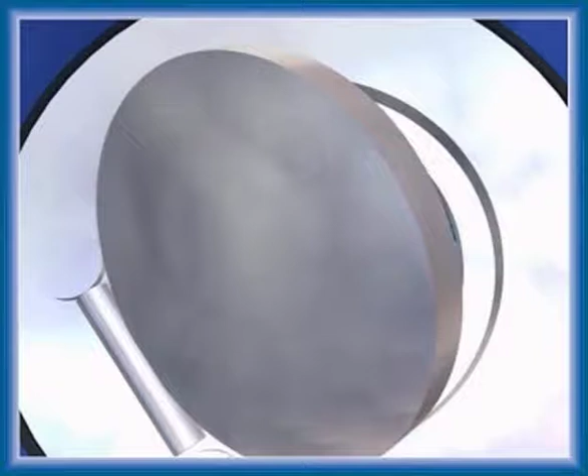Feroplast is a private company established in 1983. Its basic activity is process equipment production and trade.

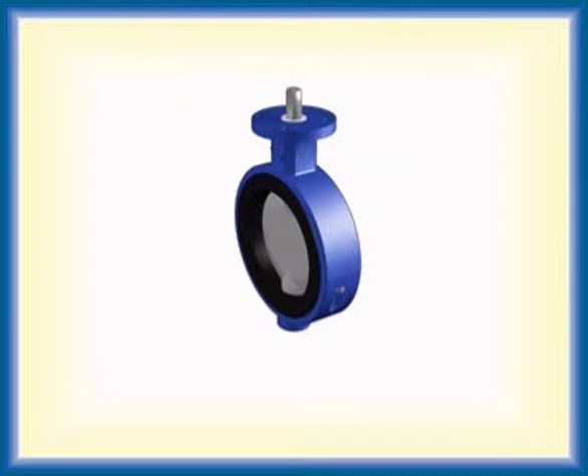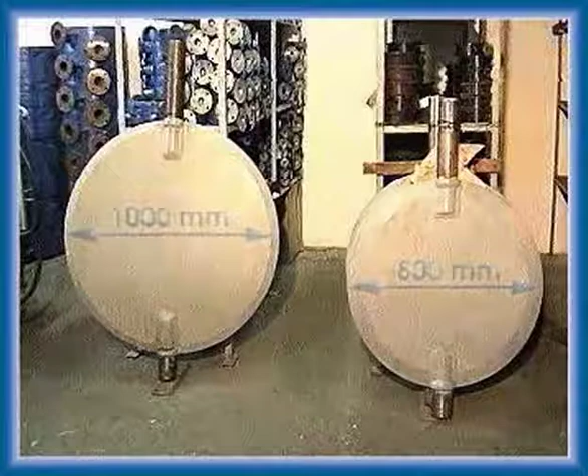The core of our production program consists of butterfly valves of all nominal diameters, intended for all kinds of operating conditions and for different mediums that flow through, with several drive types for their opening and closing.

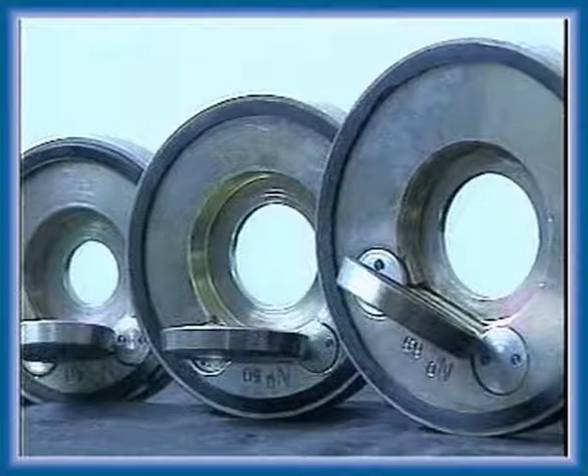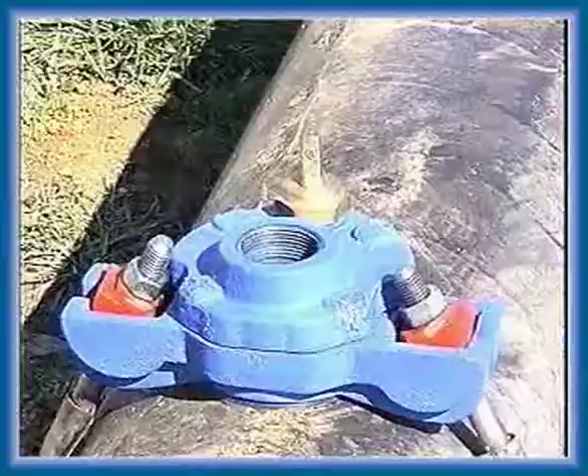Feroplast is a modern company with wide product assortment, big production series and up-to-date computer and engineering technologies in construction and output process. Applying new technologies and production programs is accompanied by acquiring quality certificates, so that Feroplast now has TÜV certificates for production process quality and for welding quality.

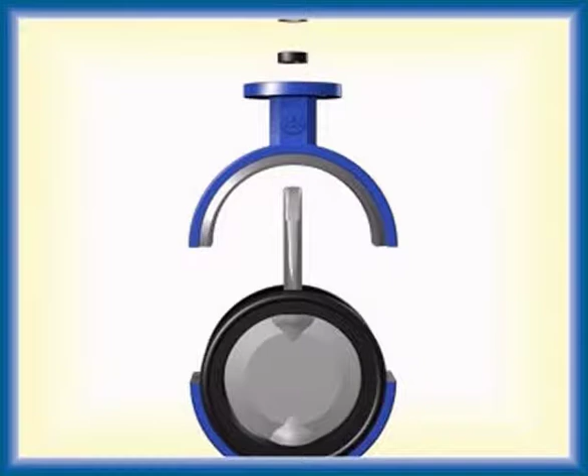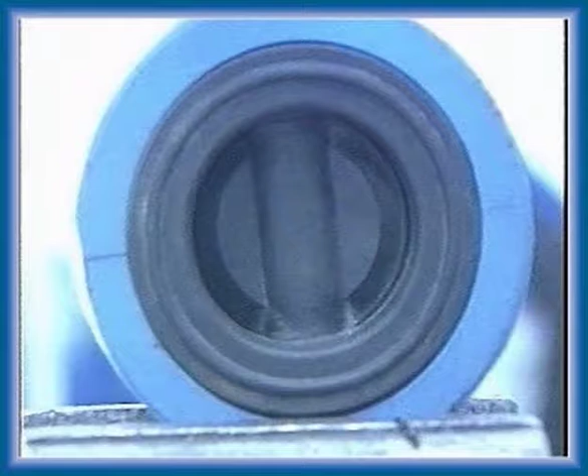Feroplast valves for chemicals, industrial waters, drinking water and food industry are applied in all circumstances where absolute sealing is required. Special manufacturing, depending on the type of mediums that flow through the pipes, enables them to be applied widely.

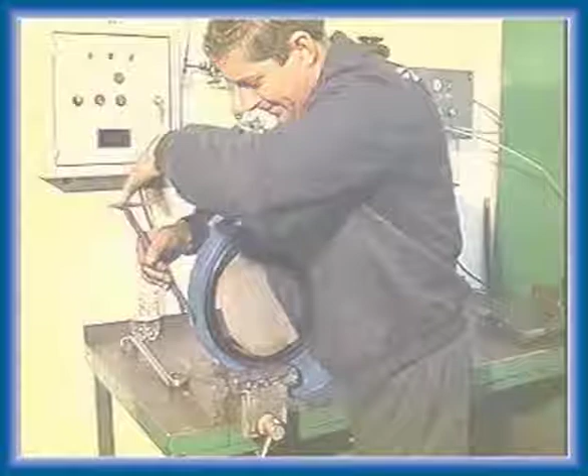For heating pipes, boiler rooms, flotation, water pipes, drinking and seawater, geothermal technology, waste and other waters, acids, bases and other aggressive substances, air and gases, oil and oil products, alcohol and soft drink industries, chemical and food processing industries.

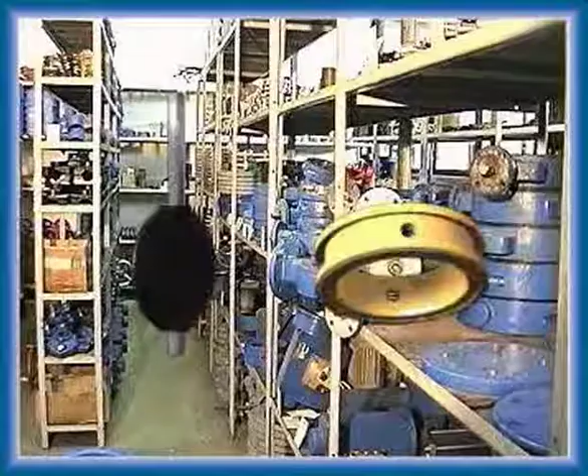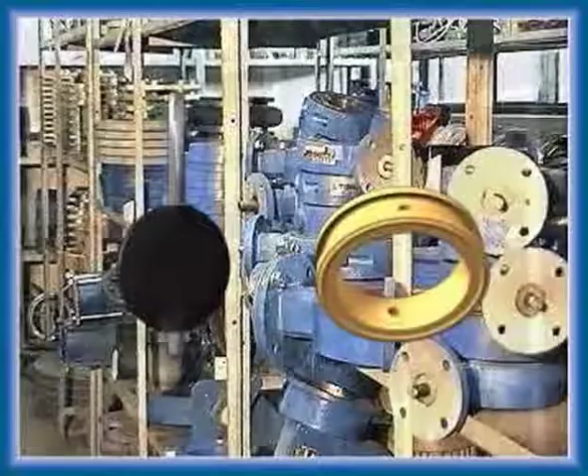The basic properties of Feroplast valves are valve diameters 25 to 1200 mm, working pressure 6 to 25 bar, compact design and weight lessened by up to 5 times, same differential pressure, irrelevant flow resistance, possibility of rapid closing and flow control.

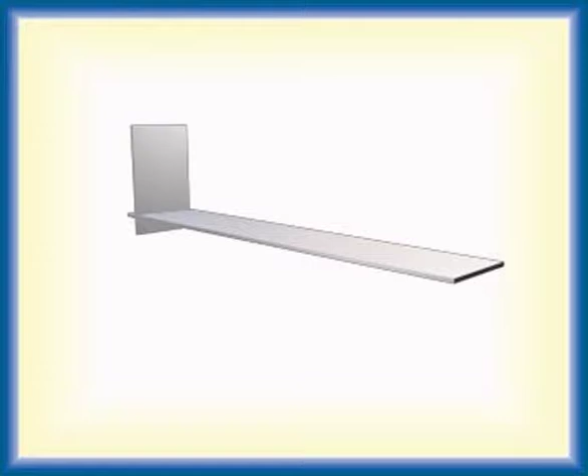Possibility of installing in any position independently of direction of flow, exceptional endurance to aggressive substances and changes of temperature, guarantee on 10,000 moves for all mediums.

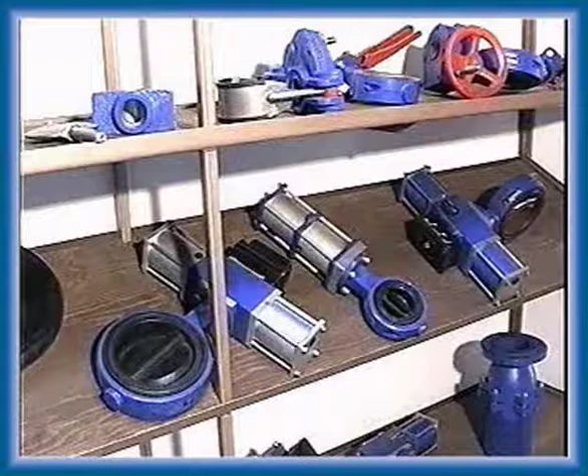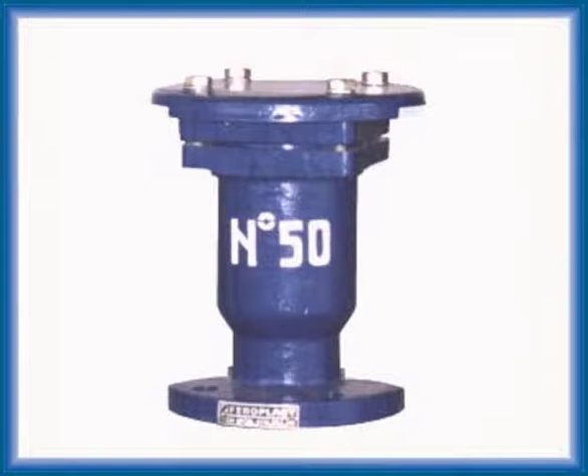Feroplast produces automatic air inlet relief valves. With one ball, it allows exit of air during filling and entrance of air during emptying, as soon as the pressure in the pipeline becomes lower than atmospheric pressure. A trouble-free operation of the pipeline is thereby secured.

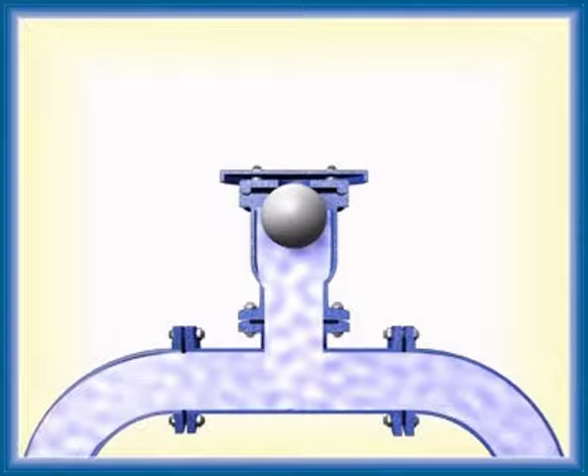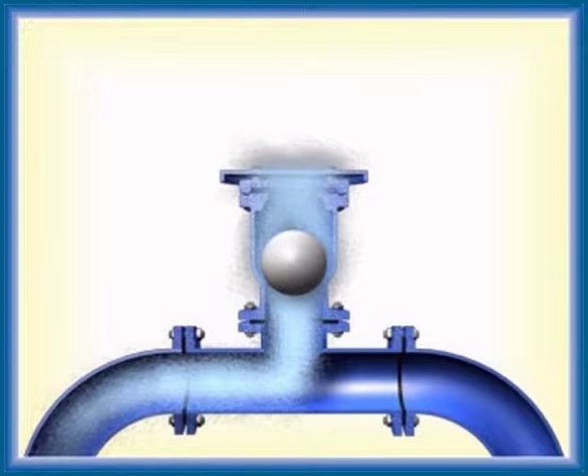Elimination of separated air, which was dissolved in water, is not possible with this design. The functioning is self-acting, based on the principle of ball buoyancy and pressure difference between pipeline interior and atmosphere. The automatic inlet relief valve is located at the highest pipeline bends.

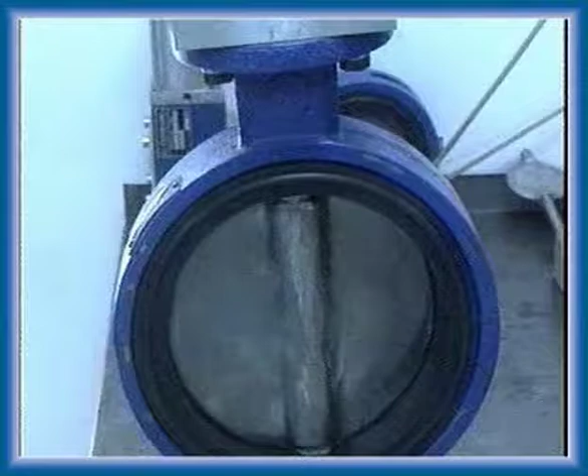For the valve operation, Feroplast makes several types of drives: manual drive, manual gear drive, electro-power drive, hydraulic and pneumatic drive.

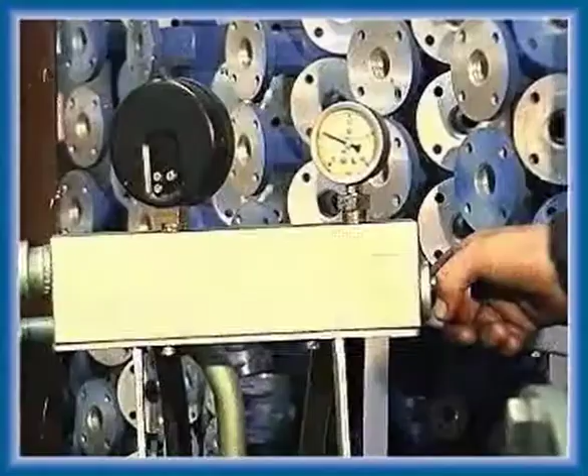Depending on technical requirements, valve drives can be supplemented with a device for signaling position or with a device for fine control of valve work, which can receive external control signals as a second option.

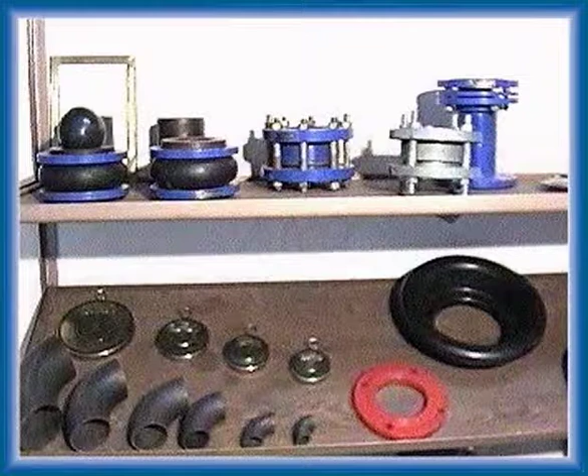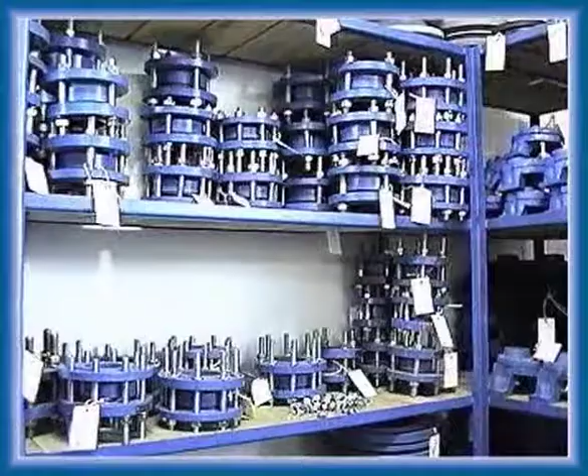Feroplast produces several types of compensators and non-return valves that are applied for different mediums, operating pressures and temperatures. They are made in different sizes, from 40 to 1200 millimeters.

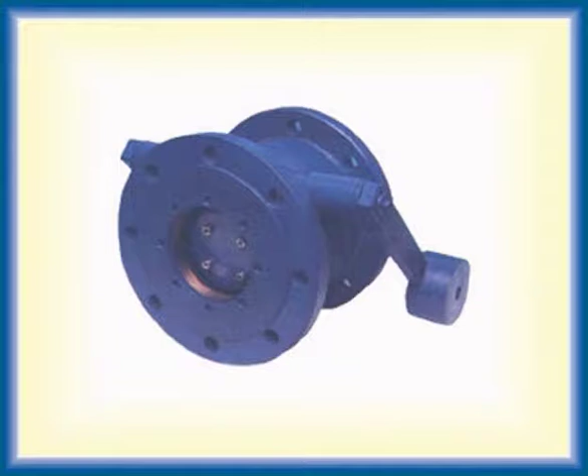Compensators are rubber, sliding, or telescopic, and non-return valves are with counterweight, swinging check valve, or non-return valve with hydraulic absorber.

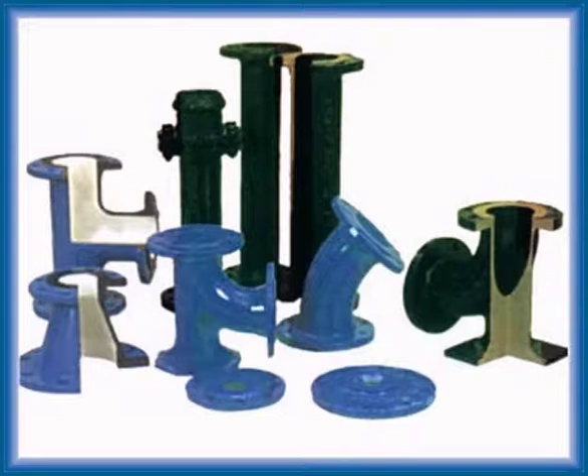All pipe fittings are made in accordance with Yugoslav and European standards. They are made of cast iron with ISO 9002 certification, nodular cast iron with ISO 9002 certification, and steel welded construction with TIF certification and welder certification.

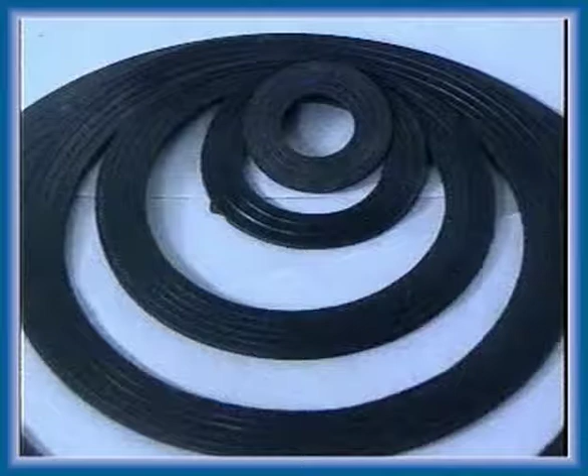Gaskets are standardized for nominal openings of flanges and are made of materials resistant to mediums in pipes.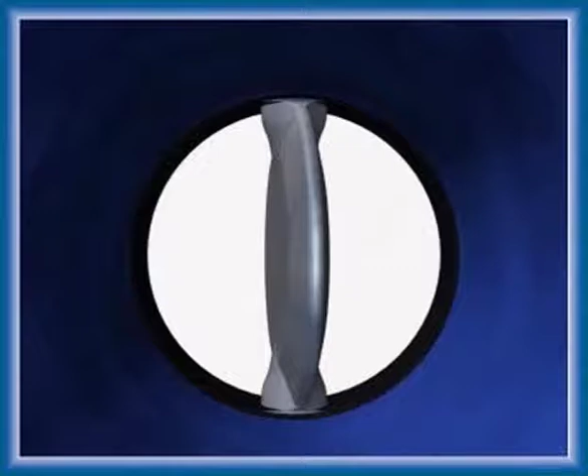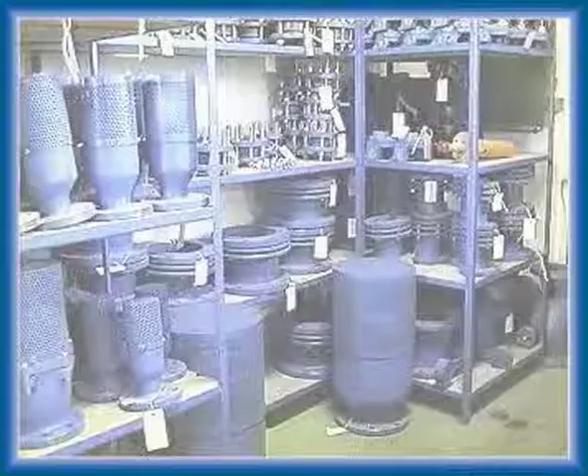In its production program, Feroplast has a great number of various water pipe connections and a wide range of water pipe equipment. Depending on types and use, the products can be applied for great consumers like industrial objects and big buildings, as well as for small consumers like family houses.

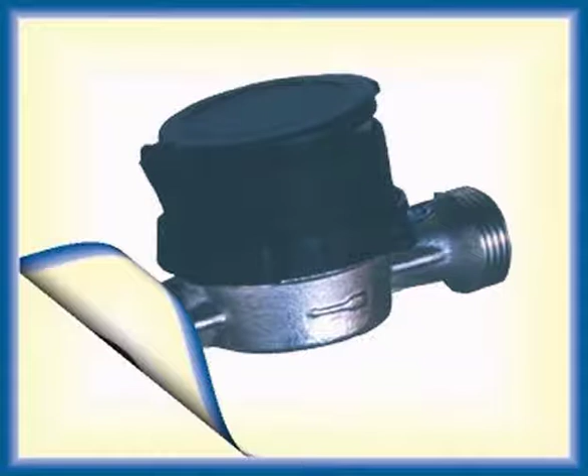The products of Feroplast in the field include flow meters with a dry rotating counter, Woltman flow meter and filter appropriate for great consumers, several sorts of universal thread connections for different purposes, suction strainers, flap valves, extended telescopic spindles for street valves.

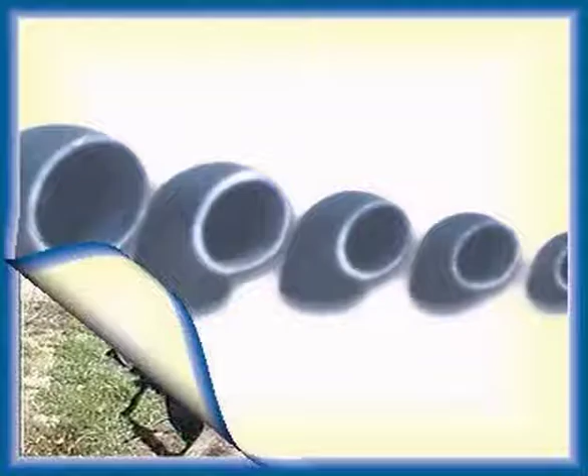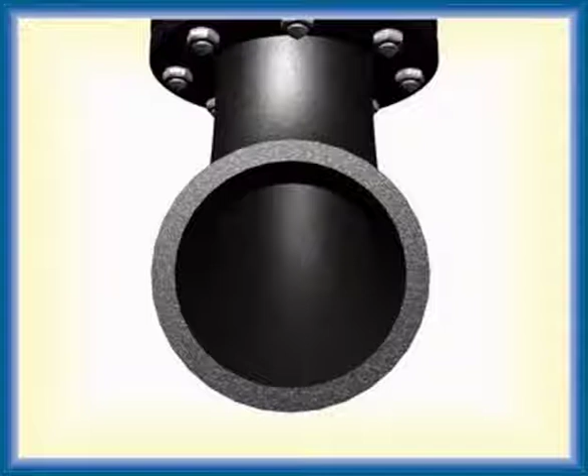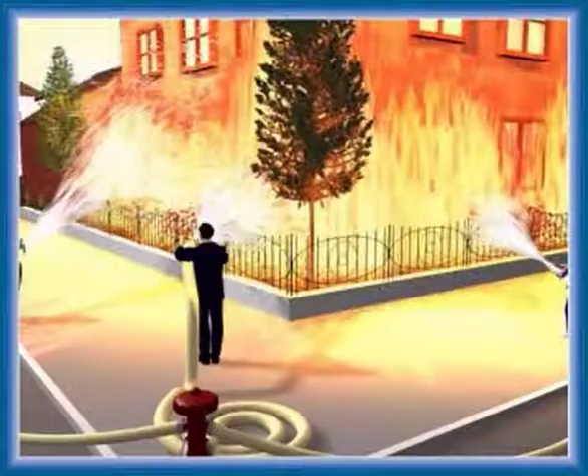No additional equipment is needed. The hydrant has an automatic safety device which disables water from flowing out through the hydrant and thus prevents lowering the pressure in the pipe in case of damage. They are made for depths from 700 to 1000 millimeters.

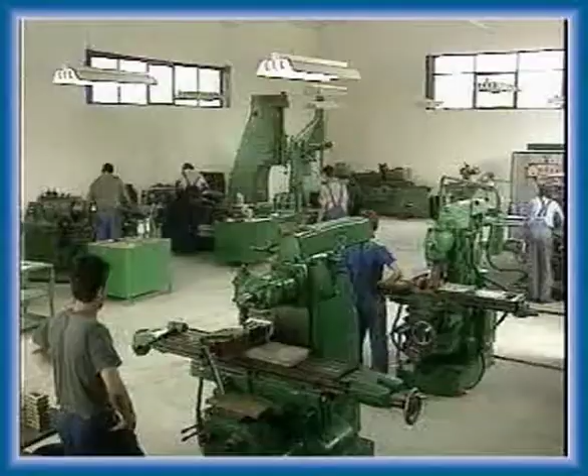Machine treatment includes treatment of frontal lathe up to 2000 mm in diameter, treatment on boring machine 1000 by 1000 by 1000, tool manufacturing, treatment of gear pairs, boring and honing.

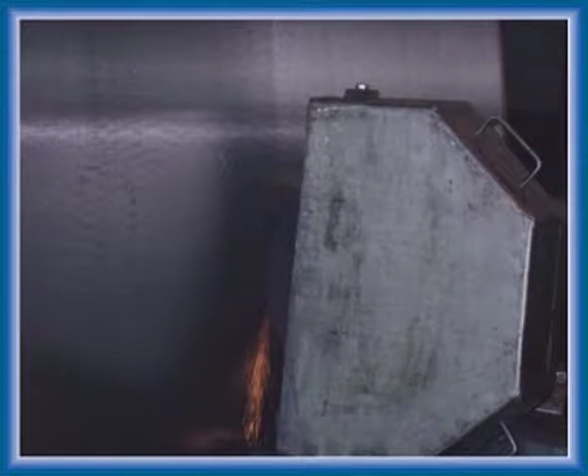Grinding of drying cylinders for paper plants and other types of rollers on the spot or in our factory, from 5000 mm in diameter and up to 4000 mm in length, manufacturing of screws, bolts and nuts.

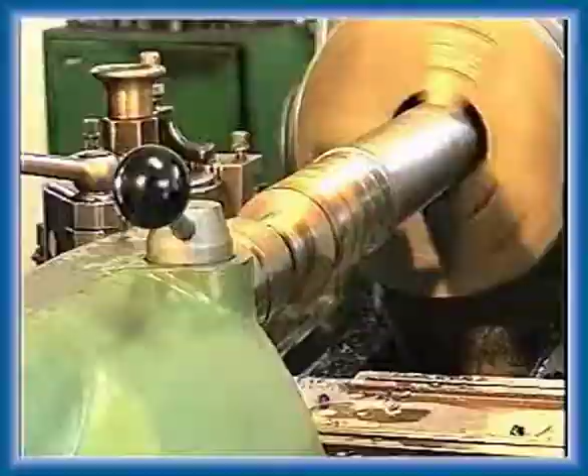Vulcanization includes casting all types of rubber in its own or customer tools up to 1000 by 1000, and vulcanization in metal-rubber combination.

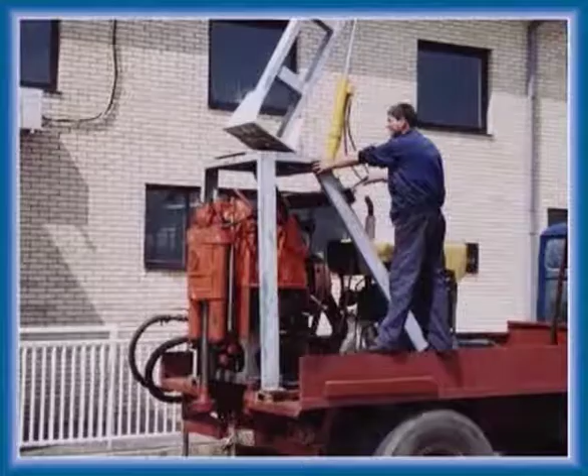Feroplast is completely equipped for repair and reconstruction of different types of special machines and vehicles, including repair of special machines for geological exploration in the field of civil engineering, dredging machines, trench diggers, as well as other types of machines and vehicles of special purpose.

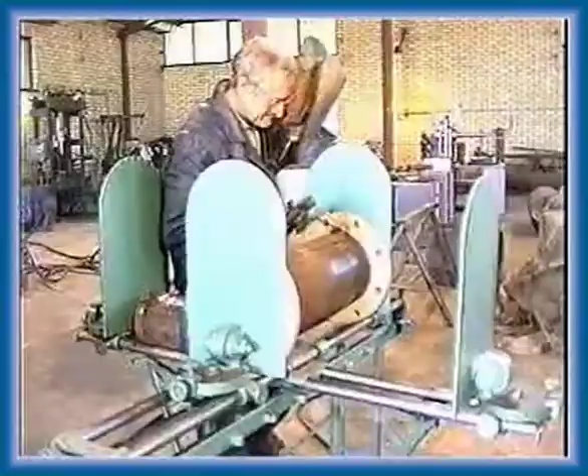Feroplast has remarkable cooperation with numerous local and foreign companies. Feroplast products are built into many objects that have been projected and implemented both in local and foreign markets.

Feroplast is a modern company that responds constantly to increasing market demands and sets new standards in the field.